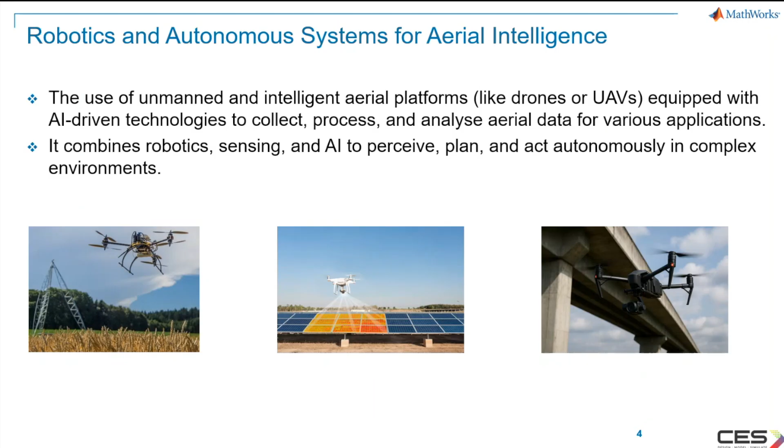The physical platforms, which are the robotic systems, are capable of sensing, decision making, and acting in the environment. And the autonomous part, these are the systems capable of operating independently or with minimal human intervention using onboard intelligence. These systems usually include key components like perception, for example, different sensors, cameras, lidars, or radars for situational awareness. Another component is decision making. This includes algorithms for path planning, obstacle avoidance, and mission logic. It also contains control and actuation components as well as the communication parts.

Let's have a look at the applications of robotics and autonomous systems for aerial intelligence. If you consider agriculture and environment, these systems can be used for crop health monitoring, precision spraying, wildlife and forest tracking. And if we consider infrastructure and maintenance, they can be used for power line and pipeline inspection, bridge and tower assessment, construction progress tracking, etc.

And when it comes to security, defense, and law enforcement, they can be used for ISR. ISR stands for intelligence, surveillance, and reconnaissance. Similarly, there are a lot of applications for these robotic and autonomous systems for aerial intelligence. I have listed a few here in the slide.

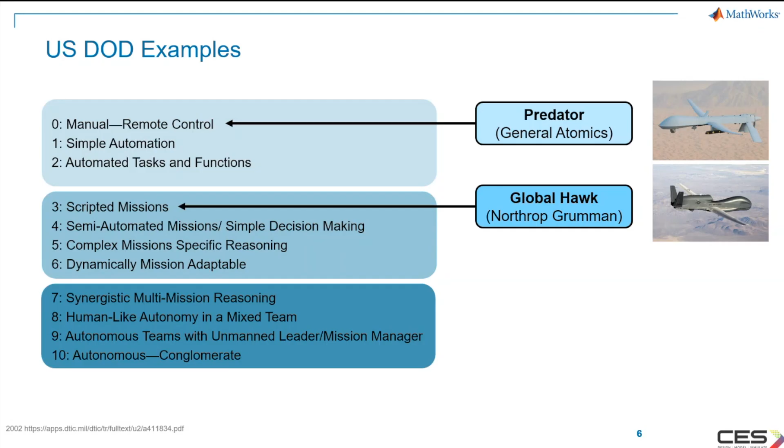Predator by General Atomics is an example for level 0, and Global Hawk by Northrop Grumman is an example for level 3. And for the third, level 7, we have URSA. It's urban reconnaissance through supervised autonomy. It's a defense program, mainly a DARPA program, to enable improved techniques for rapidly discriminating hostile intent and filtering out threats in complex urban environments.

So these three groups can be roughly summarized by the terms unmanned vehicle, autonomous system. Where would you say that your program or team is focused in general? Are you developing any unmanned aerial vehicles, unmanned ground vehicles, unmanned surface vehicles, or unmanned underwater vehicles, etc.?

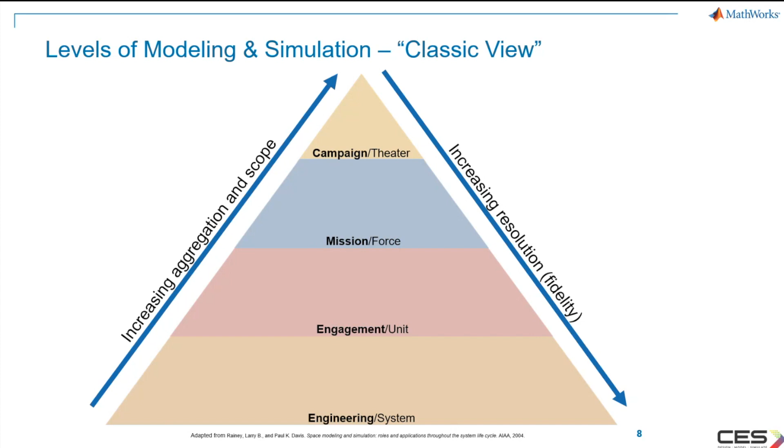So at the bottom, you can see it starts with a simple system like the engineering system. It may have a platform and many subsystems. And going upwards, there comes the engagement or the unit. It may have one versus one, or one versus few, or one versus many such systems. And then it goes up to the campaign level.

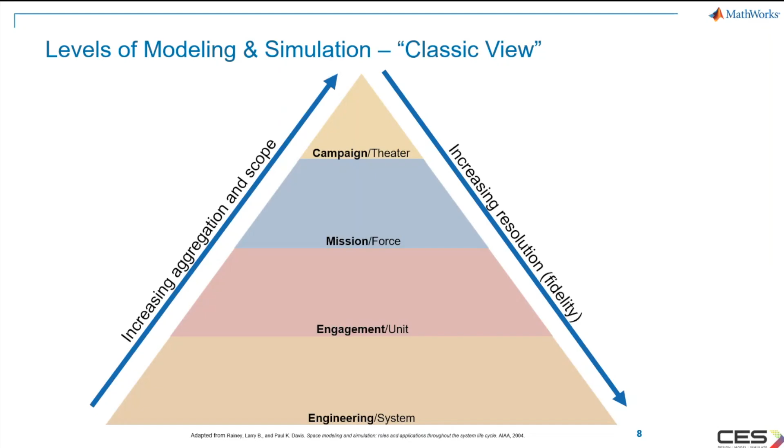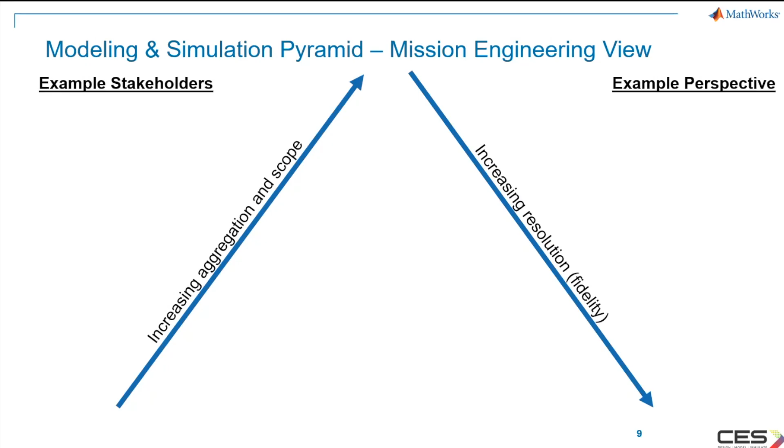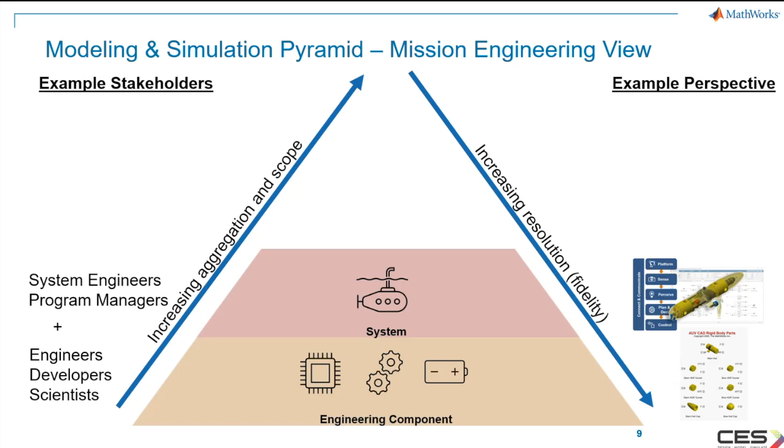Another way of thinking about that landscape is by using the mission engineering perspective. At the component level, the engineers and scientists might be developing something like the sections of a hull of a modular underwater vehicle, and then comes the system level. So here the system engineers and program managers might be interested in system level performance of the vehicle in terms of its specifications measured against a set of requirements. This could be physical specification or performance specification.

The digital engineering vision is needed to accomplish all these things. And if you want to answer all these, the mission engineering view and different levels, as shown in this diagram, we need to have a reasonable degree of confidence with the models at the foundation level, which is built using digital engineering. And I think MathWorks can help connect the stakeholders across all levels here.

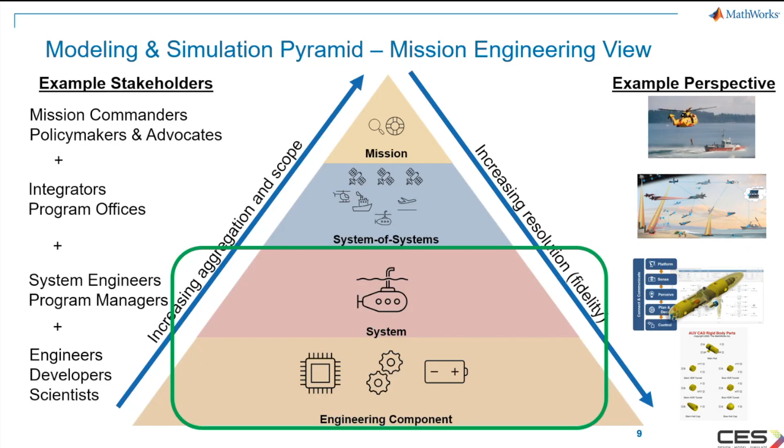Model-based system engineering is a key enabler for mission engineering, which focuses on achieving mission-level outcomes rather than just developing individual systems. In mission engineering, multiple systems like UAVs, sensors, the communication links, and ground control must work together towards a common objective. And MBSE, or model-based system engineering, ensures interoperability and coherence across the system of systems. It also supports digital mission threads, like linking models across different life cycle stages from concept of operations to verification and validation. Let's see what exactly MBSE, or model-based system engineering, means.

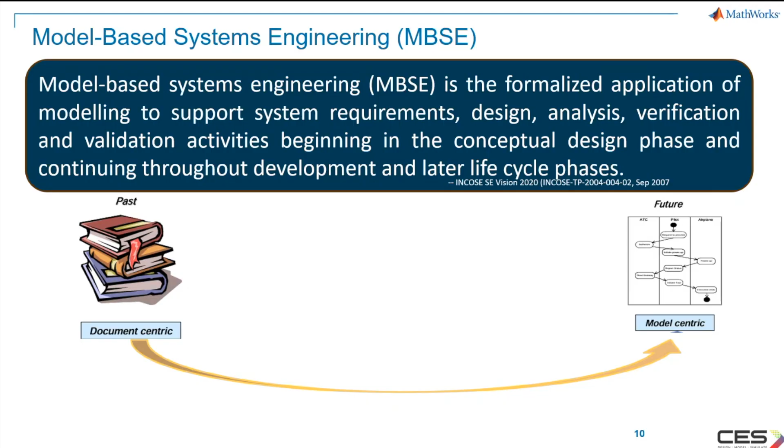Here is the definition as per the INCOSE SE vision. It's a formalized application of modeling to support system requirements, design, analysis, verification, and validation activities, beginning in the conceptual design phase and continuing throughout the later life cycle phases. So what does that mean? The formalized application, and so on. Let's split this definition and consider it one by one.

So model-based system engineering is a formalized application of modeling. What it means is it is well structured, it is documented, it is practiced, and it is well supported. And then the next part is the application of modeling. So these models can be a physical model of your electrical or mechanical system, or a combination of both, or it can be behavior modeling, or it can be a functional model. So in any case, modeling is a core practice of model-based system engineering.

And then comes supporting the system requirements, design, analysis, verification, and validation activities. These are some of the common or practical steps in any product design. So when you are adopting model-based system engineering for your product development, you should be using modeling to support all these activities. It starts from the conceptual design phase and it continues throughout the development and later life cycle process. Almost every engineer is involved in some degree or form, and it covers many types of products. It can be hardware, or it can be software, or it can be a service oriented activity.

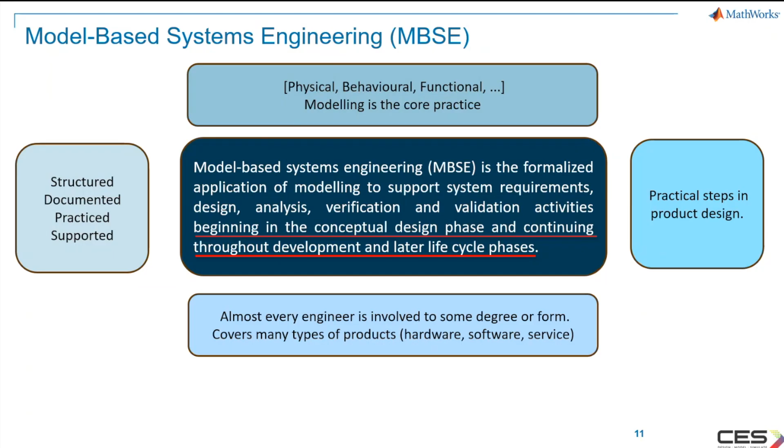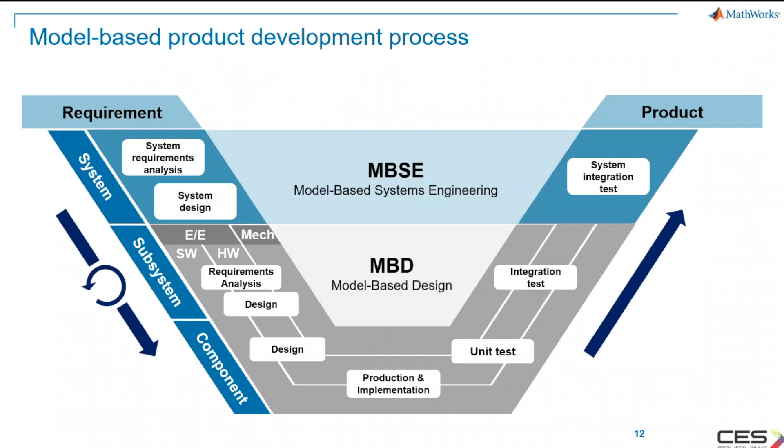MathWorks is a one-stop shop for model-based system engineering. We have the solutions supporting each of these activities that you have seen in the V cycle. We provide solutions for architecture and design analysis, control algorithm development, rapid control prototyping, report generation, and if you have any safety standards to meet like ISO 26262 or DO-178C, we have the solution for that.

Sometimes your project may include physical modeling of electrical and mechanical systems, so we have the solution for that. It is followed by code generation for the controllers that you are using, so we have solutions for that as well. And for the testing, which is on the right side, it can be model in the loop, software in the loop, processor in the loop, or even hardware in the loop. And finally, the system integration testing. So MathWorks provides a solution for all these.

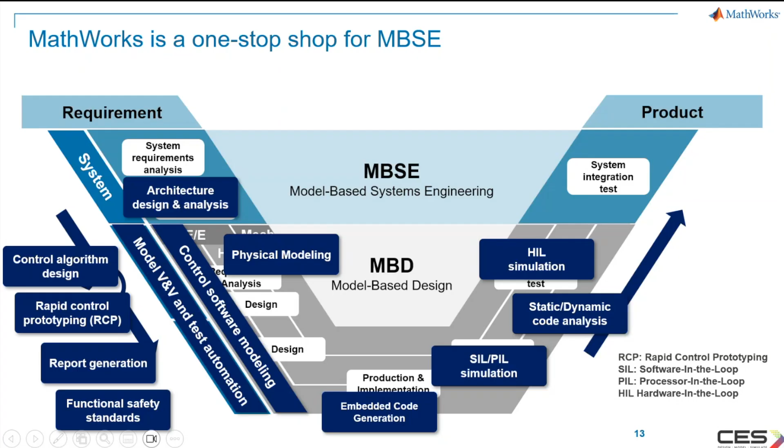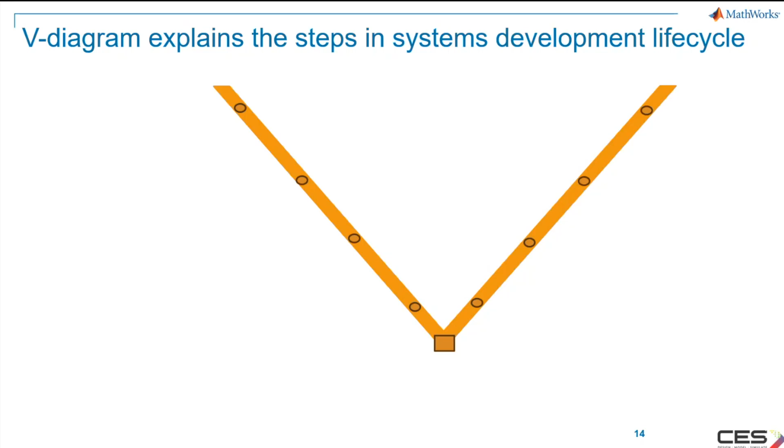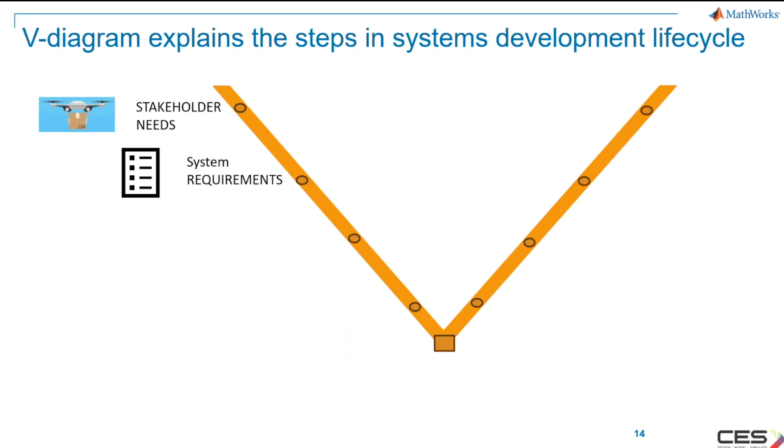Let's see an example of how you can implement this V-cycle in system development. We are going to use delivery with a drone as an example to think about what it means. So first, we have some stakeholders. They have some needs about the drone delivery method. Based on that, we derive some requirements for our system about the weight, capacity, range, and all.

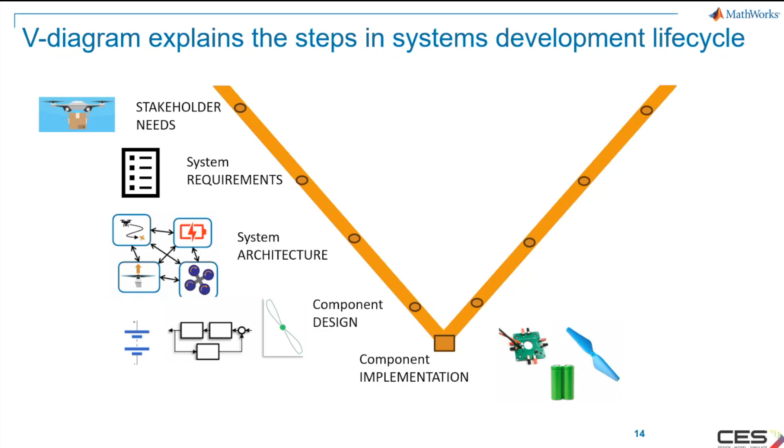And then we create the subsystem architecture and the system architecture, the connection of those. For example, the path planning, battery management, propulsion, flight control, etc. And then we go to the component level design of the battery, the propeller, and the control algorithm. And then the next step would be the implementation of those and verification of that in real hardware.

And then you have to create this in the physical world if you're designing hardware, and then combine those components together to create the subsystems that you have and verify those designs. At the end, you combine all of those, create your system, verify that, and then operate and maintain your product. In all these steps, you have to do some validation with the models, requirements, and simulations that you have on the left side of your diagram.

As you see, on the top we are working on the system level, and at the bottom we are working on the component level. It would be more cost effective to catch any issue in the earliest stage of the product design, pinpoint and resolve them using MBSE practices. What you have seen is a drone being used for a delivery application. So we have the solutions for helping you to accomplish all the activities mentioned in this.

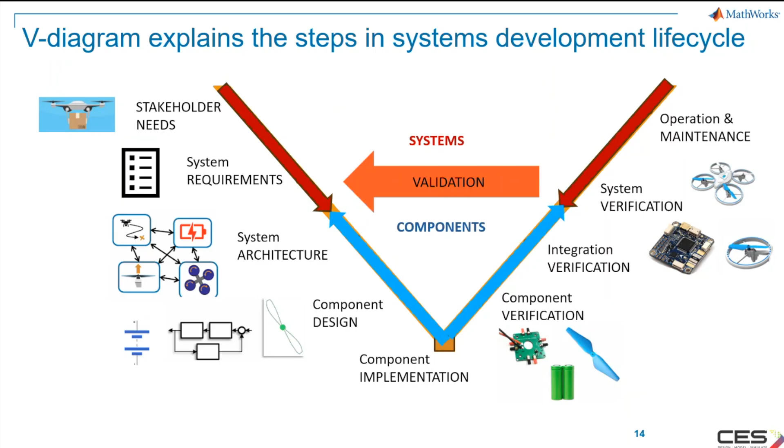Now let's see how MathWorks helps in autonomous system development. We'll start with the common challenges and then see the activities included in addressing each of these challenges. This lists the challenges in different phases of autonomous system development. We may be starting with the system definition. You may have some challenges with the documentation of your requirements as well as managing the traceability from requirements to code.

Coming to the platform side, it may be about how you model the physical interaction and the system dynamics. On the autonomy or algorithm design, the challenge may be about designing fusion algorithms that incorporate data from various sensors. Sometimes it's about designing path planners for different optimization goals, or sometimes it's about how to visualize and analyze data from different robots.

The challenges can be related to verification and validation also, and sometimes it's about how to evaluate your algorithms in photorealistic simulations. And there can be challenges when you try to connect to your platform or to the robot, such as how to design a data acquisition system via Robot Operating System, etc.

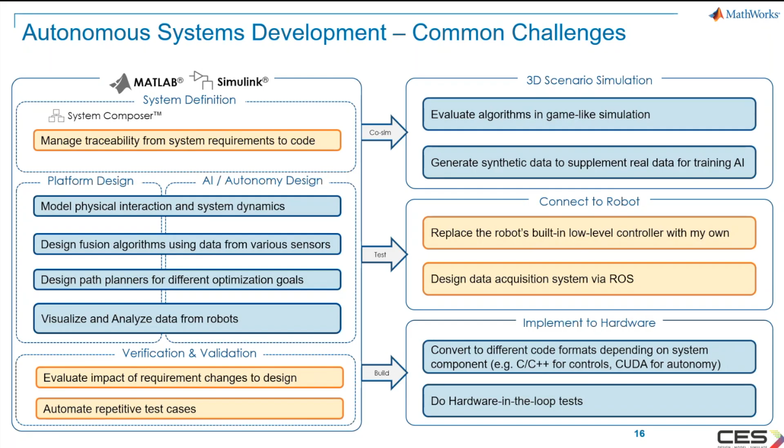Here is an example of different activities which are involved in autonomous flight development or UAV development. System definition, platform design, autonomy, verification, validation, 3D design scenario, connection to robot, implementation to hardware: these are some of the commonly used activities, and we have solutions addressing all these things.

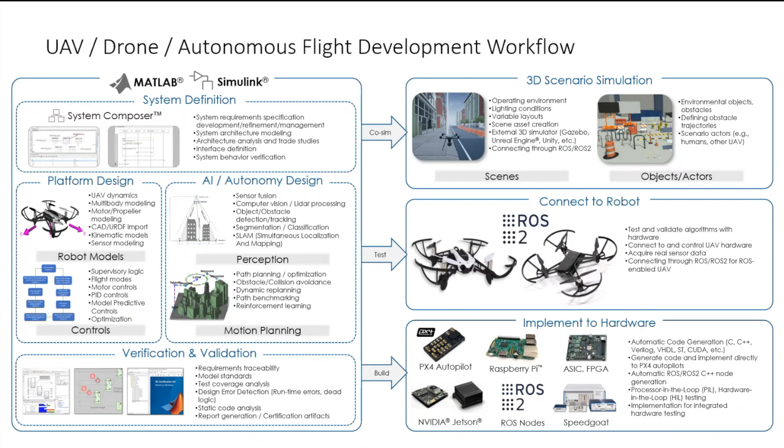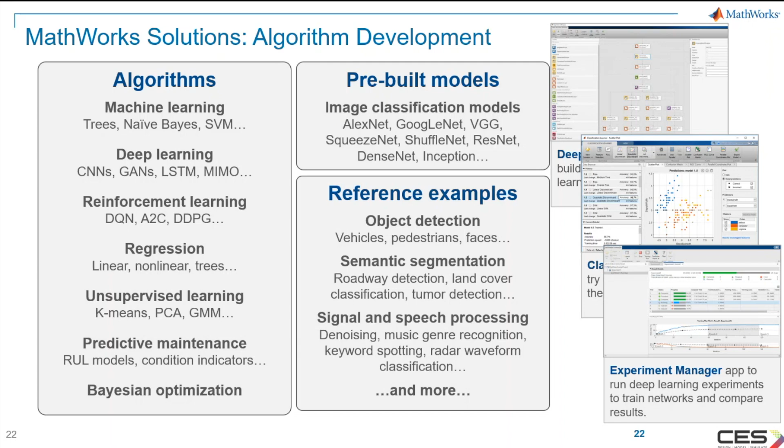The next topic is about why you should use MATLAB and Simulink for artificial intelligence aerial intelligence applications, especially over other software. Here are the reasons why you should use MATLAB and Simulink for aerial intelligence applications.

We support an end-to-end workflow, starting from the conceptual phase to simulation, and then finally to deployment.

We have the solutions. If your platform is for aerial platform development, we have accurate UAV and sensor modeling options. We also provide built-in AI and machine learning integration, and there are solutions for real-time testing, especially for rapid control prototyping or hardware in the loop. We can cover that, and we also provide solutions for advanced data fusion visualization.

Finally, MATLAB and Simulink is a certified, reliable, and scalable environment.

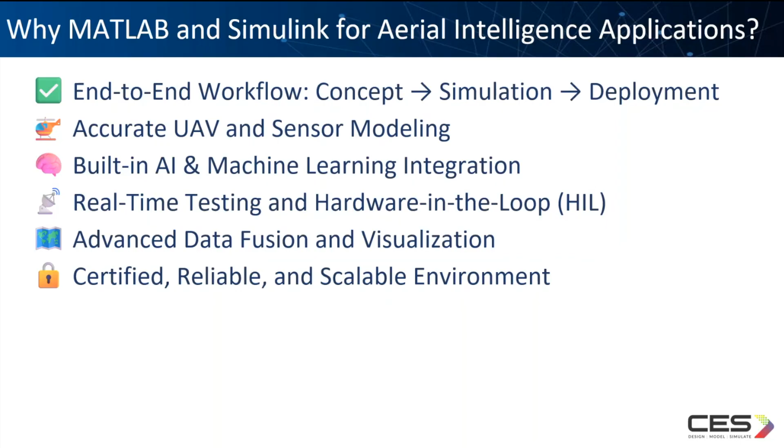I've just mentioned different solutions. Let me show you an example of aerial LiDAR data segmentation using AI and toolboxes. First, I will start with a simplified view of any AI-driven system design workflow. It has mainly four stages: data preparation, AI modeling, simulation and test, and deployment.

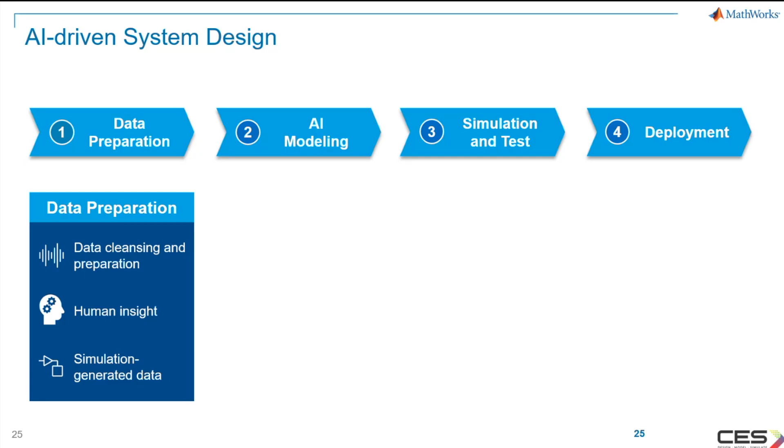In this demo, we are applying a semantic segmentation network for a large point cloud using block processing. Semantic segmentation of point cloud is a process of classifying each point in the point cloud based on the object that is present at that position.

Here for this demo, we are using a state-of-the-art neural network, PointNet++, which can segment point cloud into different classes like vegetation, buildings, road, etc. This PointNet++ is a hierarchical neural network architecture designed for processing 3D point clouds, building on its predecessor named PointNet. This neural network is particularly useful if your LiDAR data is unorganized.

The first step is data preparation. Here you'll create the blocked point cloud, and then pre-process this point cloud to prepare it for applying the AI model.

In the second step of AI modeling, you have to define a PointNet++ network to segment the point cloud. In the third step, we will see how we can test our model on simulated data. And then finally, we will deploy the algorithm on target hardware.

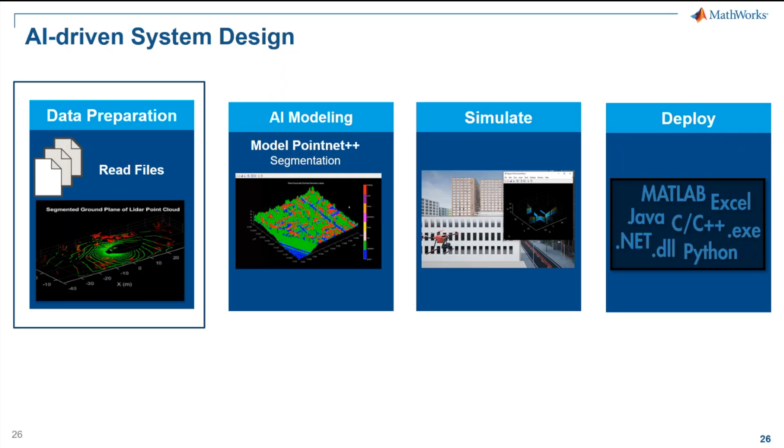MATLAB gives you the flexibility. The first step is data preparation, and MATLAB gives you the flexibility to read data from popular file formats such as LAS, LAZ, PCD, PCAP, etc. You can also stream live LiDAR data from Ouster or Velodyne sensors. In addition, you can read point cloud from ROS bags as well.

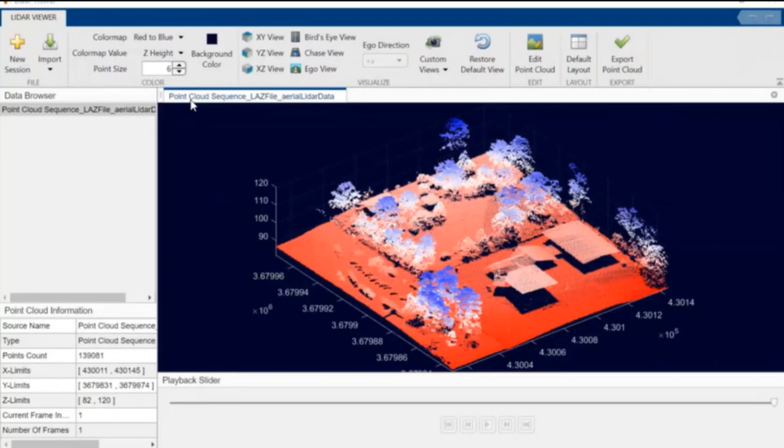Once we have loaded the point cloud data, we can use the LiDAR Viewer app to visualize, analyze, and edit the point cloud data. We can import point cloud in different file formats like LAS or LAZ.

We can toggle between different types of visualization like red to blue and Parula. We can adjust the size of the points, zoom in or zoom out, and pan. Then we can select different views, including custom views and many more.

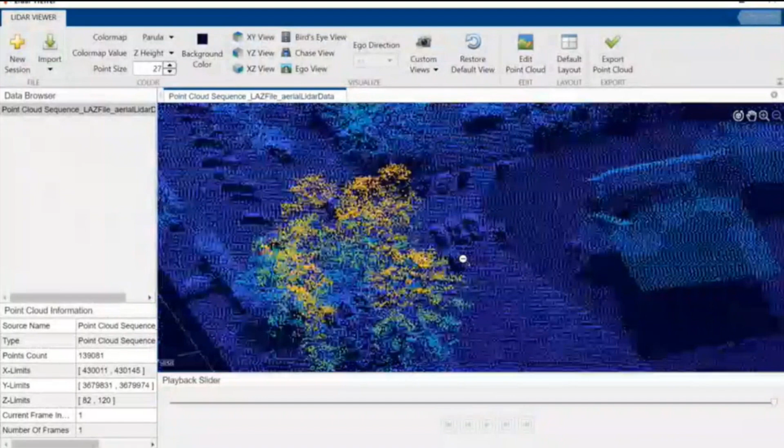The key feature of this app is that it allows us to apply basic pre-processing algorithms such as denoising, downsampling, and ground removal.

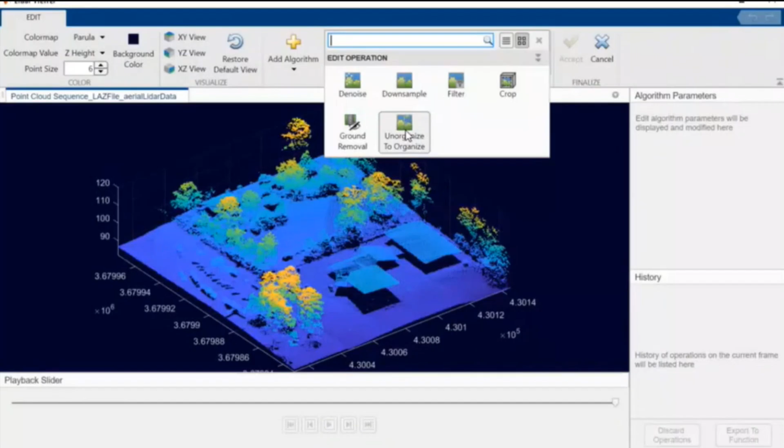Denoising and ground removal on the point cloud interactively. In the video, it shows the different pre-processing steps.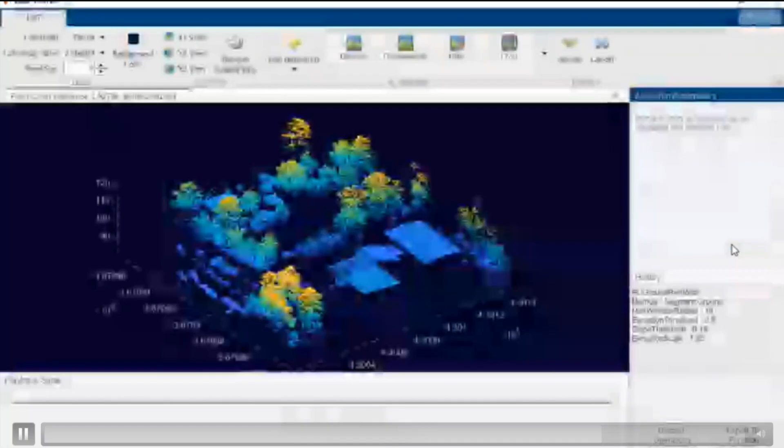Also, in this video we show how to remove the ground and to crop the point cloud to an ROI.

Once we are done with the pre-processing, we can export the pre-processing functions as well as the processed point cloud into the MATLAB workspace. Now we have read the point cloud, pre-processed it, and visualized it using the LiDAR Viewer app.

You can also pre-process the point cloud data using command line functions. You can find a variety of point cloud pre-processing functions in our documentation page.

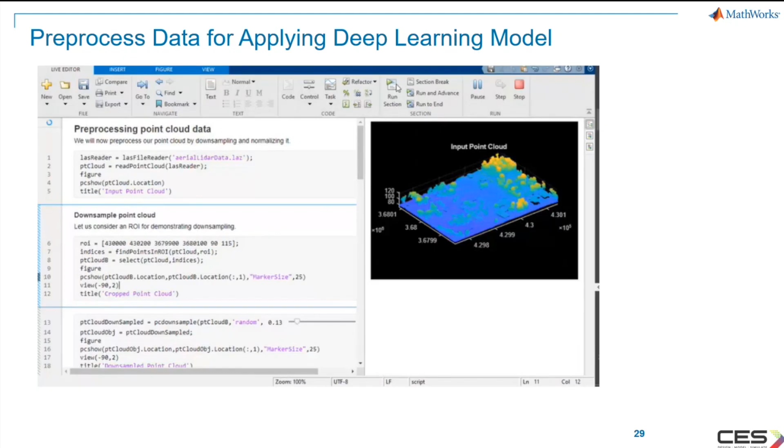In our workflow, we are implementing downsampling and normalizing functions. Here is an example.

We can use the PC downsample function on the point cloud without compromising its structures. We can also do the normalization on the point cloud based on the XYZ limit and range with a few lines of code, as you can see here.

The next step is about segmentation, so we will segment the point cloud. While our focus is on deep learning based segmentation, I will give you a brief overview of other segmentation techniques as well.

Different methods used for segmenting LiDAR data include classification using feature extraction and semantic segmentation. For this example, we'll mainly be using semantic segmentation.

If you are using clustering in MATLAB, you can use the PCSegDist function or the segment LiDAR function for clustering.

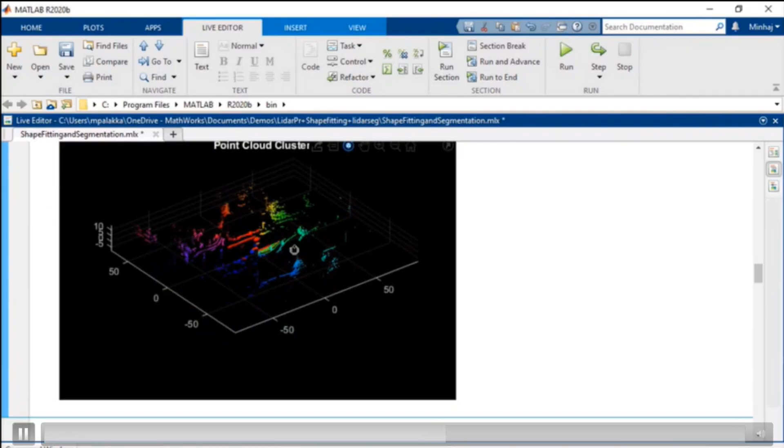While PCSegDist function can be used on both organized and unorganized point clouds, the segment LiDAR function is designed to cluster organized point clouds, resulting in faster execution.

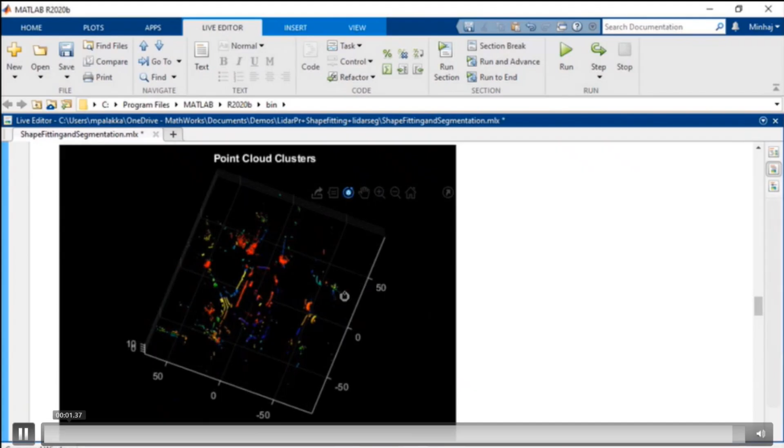The next method is classification using feature extraction. Here, features like normals or curvatures of the points on the point cloud data are used. This uses the fact that buildings are more planar than vegetation, and vegetation points are more scattered, resulting in a higher change in curvature values compared to buildings.

Using this difference, we segment the point cloud into buildings and vegetation. The last method for segmentation uses deep learning models.

Here we will be using the state-of-the-art PointNet++ to segment the point cloud. As mentioned earlier, it's a neural network used for semantic segmentation of LiDAR point clouds. It classifies each point in the point cloud based on different classes like cars, trucks, ground, or vegetation.

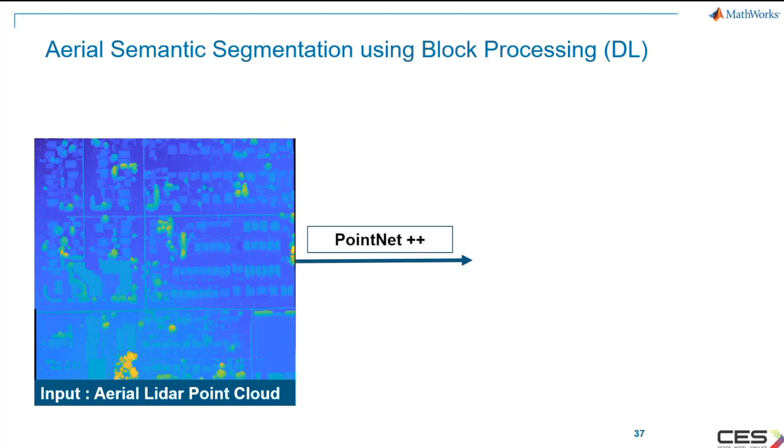The network contains an encoder with set abstraction modules and a decoder with feature propagation modules. The network tries to find local features and then group them into larger units to find higher levels of features from LiDAR point clouds.

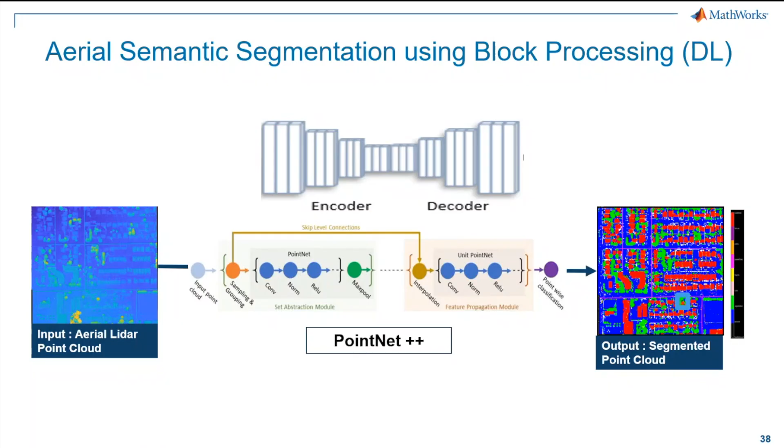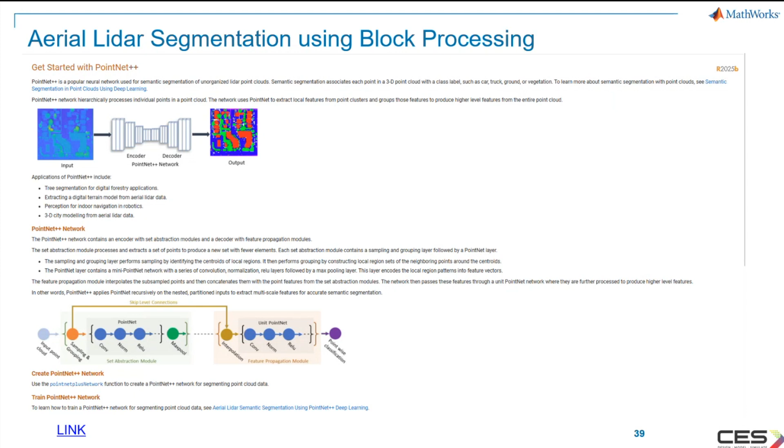There's detailed documentation available to help you get started with the PointNet++ network on our website.

If we zoom into our output, we can see that it resembles the ground truth data. Now let's see how we got this output using MATLAB's block processing workflow.

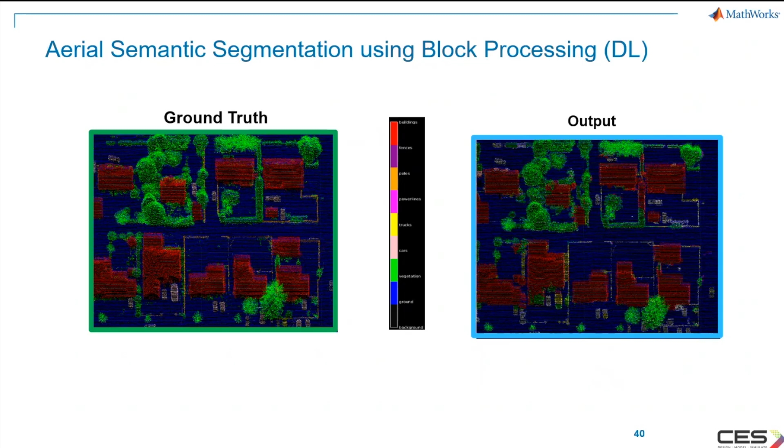As a first step, we will define the block size and create the block point cloud object and the block point cloud data store. This data store helps us manage the point clouds and avoid out of memory issues.

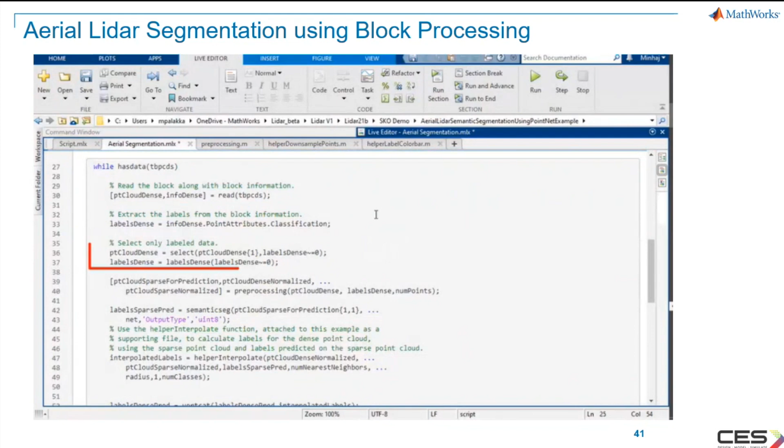We will then define a few parameters needed to apply the network, like class names and the number of points in each block. After that, we load the pre-trained PointNet++ network. Now let's read the individual blocks from the data using the read function, and then we will extract the labels from it.

We will now process the point cloud block. We mainly apply two pre-processing steps here: first is downsampling, and second is normalizing.

After that, we will apply the network on the block point cloud using the semantic segmentation function. Finally, we will assemble the point cloud blocks and stitch the whole blocks together. Here is our final output.

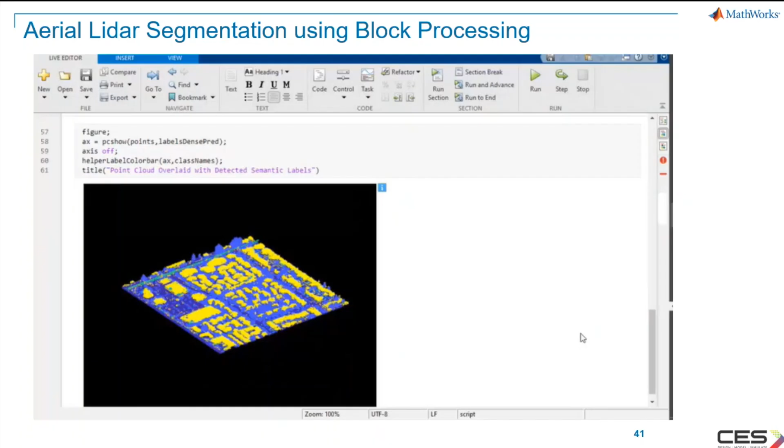You can see that we have segmented the input point cloud into different classes like buildings, trees, and ground.

Now, if you want to test your network before applying it into a real-world system, you can use the simulation environment available in Simulink.

Here I'm simulating a city scenario with a UAV flying based on different trajectories. In this model, you can see a LiDAR sensor is mounted, and we have defined a few sensor parameters based on my need.

Something is wrong with playback, so this is actually a screenshot of the model which is being used.

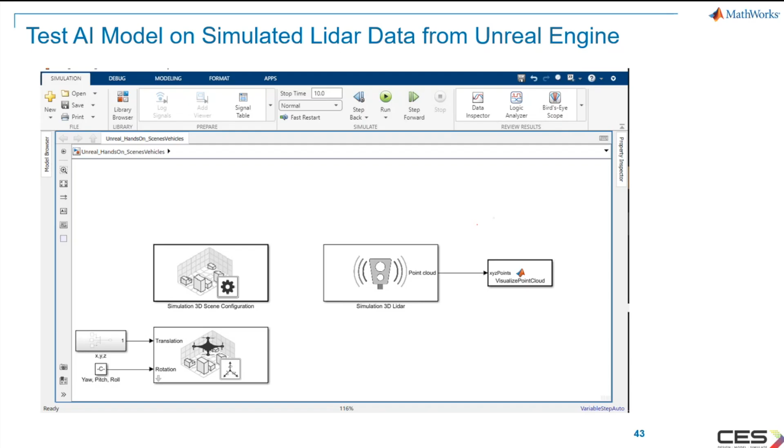Now we can run this model and collect the point cloud data, and then apply the AI model to test it on the data.

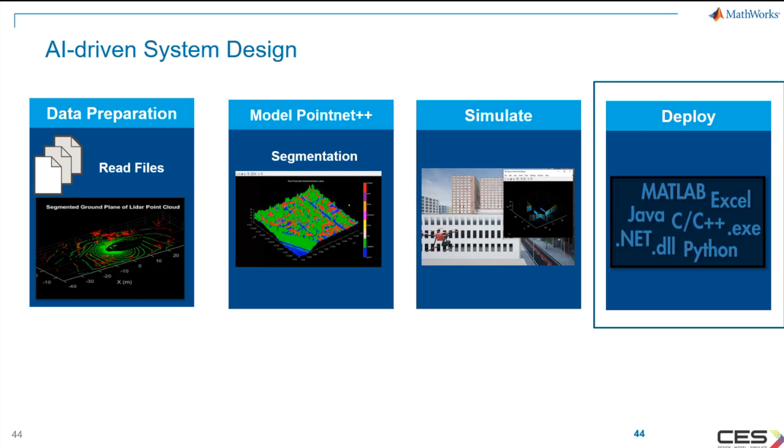The last step in designing an AI-driven system for segmentation of aerial LiDAR data is deployment. So we have segmented the point cloud, now let's move on to the final step, the deployment.

From MATLAB, you can generate C++ code as well as CUDA code for deep learning. You can use the MATLAB coder for C++ code generation.

After that, you can generate the code. This code provides a report which you can use to trace it back to the corresponding MATLAB code.

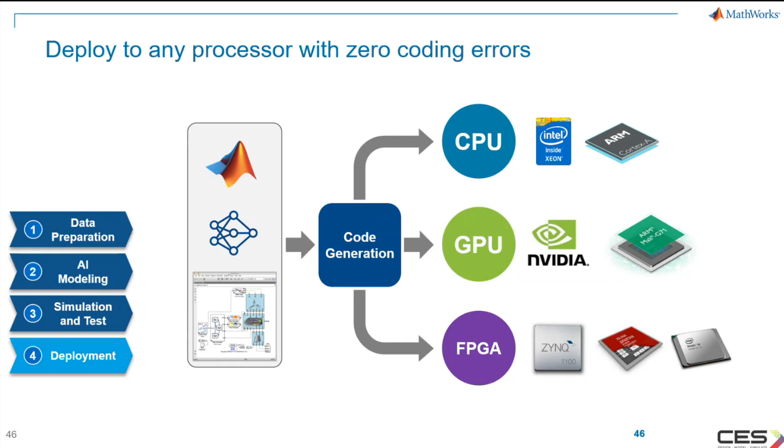It's not only GPU code that you can generate. We have a unique code generation framework that allows models to be developed in MATLAB or Simulink and deployed anywhere. You can generate C++, CUDA, Verilog, VHDL, or PLC code using the coders from MathWorks.

With this, I'm wrapping up the workflow for aerial LiDAR processing. We have the solutions to read, stream, and write the LiDAR data, and functions that support block processing. There is a complete AI workflow with pre-trained models, training, evaluation, and validation, and apps that help you label the data. And for deployment, we have a range of coders.

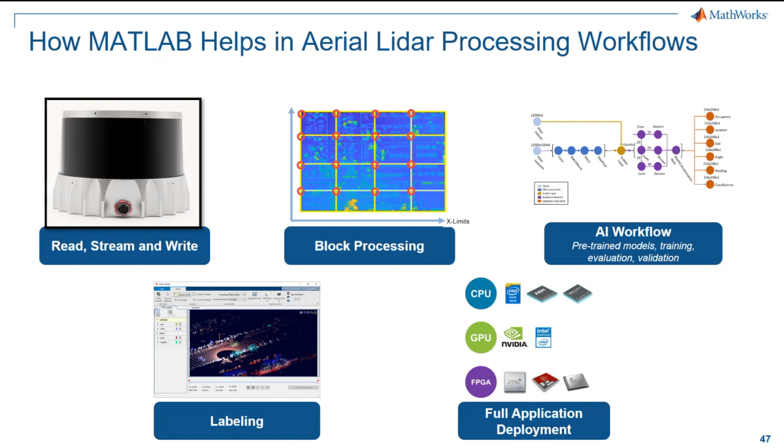Next topic is about a few examples related to aerial intelligence applications development with MATLAB and Simulink.

The first one is about detecting risk trees near power lines. This example shows how to detect trees that could fall on power lines and cause outages and interruptions. Risk trees are detected from point clouds collected from aerial lidar scanning. LiDAR data can provide information on the vertical structure of trees, and it can also penetrate foliage to provide elevation information on the ground.

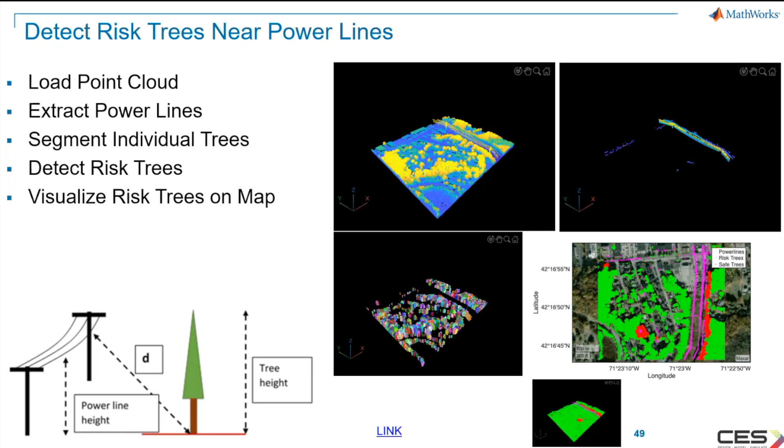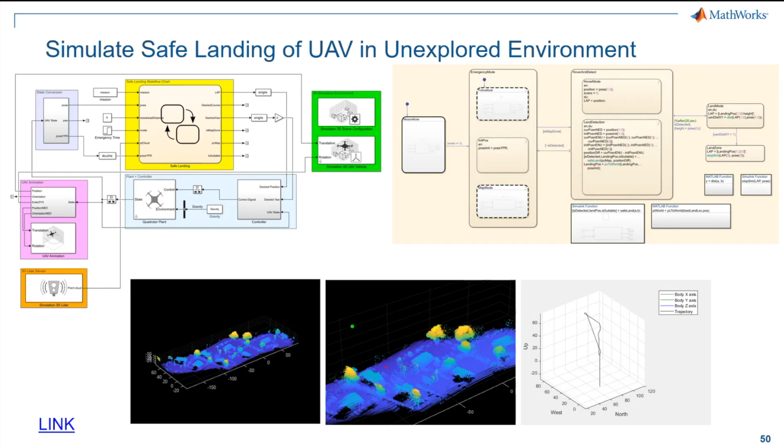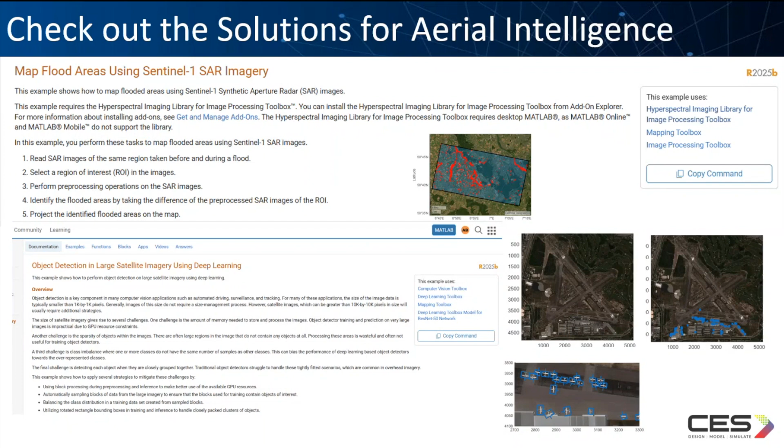To help you with the transformation with the right support, MathWorks provides trials and evaluation, consulting services, training services, and technical support. CES will also support you in these activities. If you need any support of this kind, please feel free to reach out to us. Thank you.